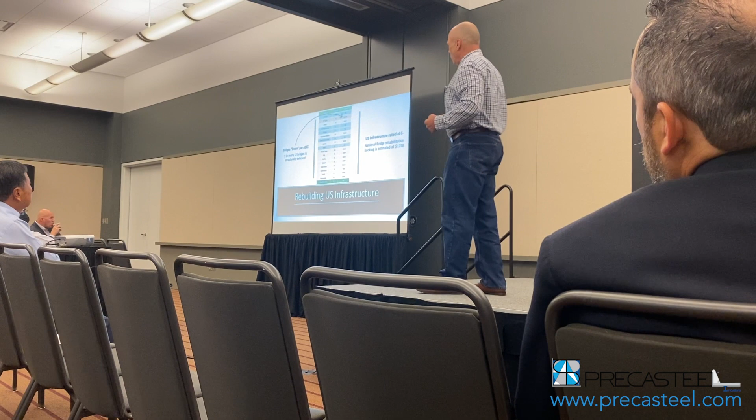But one of the areas that I found throughout 20 years in New York City, PMing jobs. I was with PB and I got pulled away by a headhunter for twice my salary to go to the construction side again. Started on the construction side, ended up back on the construction side. Money dictated, right? I had a couple kids, not your typical student or engineer, nothing in my life's typical. Anyway, these bridge brackets, every job I got on, I had issues with these bridge brackets.

Well, I had to commute 2 hours in, sometimes 3 hours home, a lot of time to brainstorm. And these are one area I started looking at as an area that could get improvement. During my military time, I was in Lebanon for 6 months. I saw these aqueducts built before Christ, and I saw the overhangs there, and I reflected back, I'm like, they're still building overhangs the same way they did before Christ. Come on, there's gotta be a better way.

They've improved the interior with the SIP forms and stuff, so why can't we do it out here? So that's where the juices started cranking, and I really started thinking about it. And everything's below, so it's really antiquated, and it's very time consuming, and it's very dangerous actually, because I don't know how many times I've come in and the winds have blown. It's basically a kite. Until you get any concrete on it, this thing's very prone to uplift.

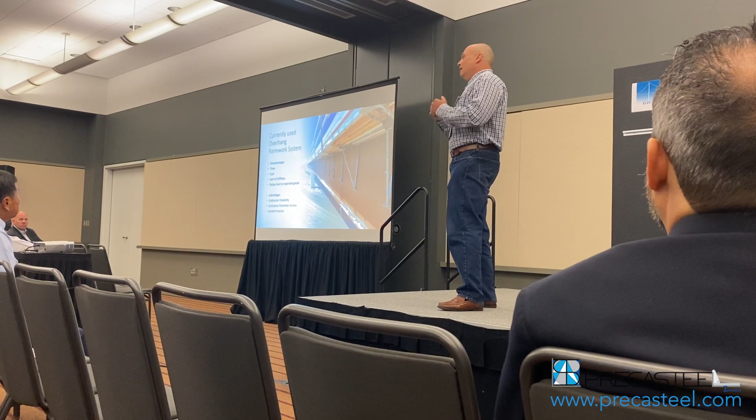And I've experienced, and most contractors have experienced, and I'm sure some engineers have heard about it, but it's really not a very safe or fast way of doing this type of construction.

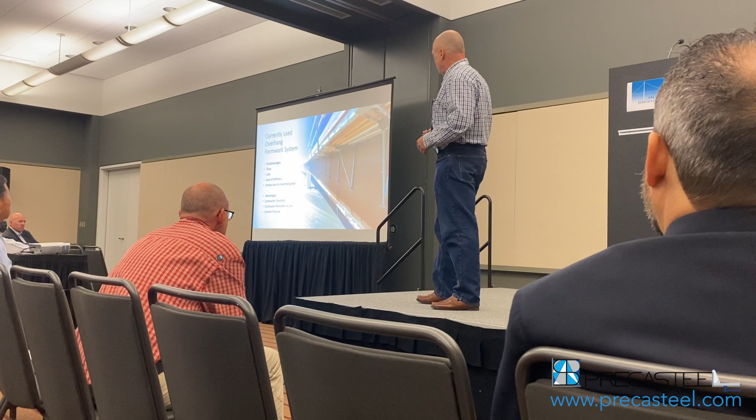Here's one of the pitfalls that Texas DOT found. Because of their bulb tees and their flanges, so on top of all the obvious stuff, there's stuff that's not really intuitive, but this shear failure here is basically just a point load on the edge of a thin flange, and it doesn't matter how far back they put it, that little rod's gonna bend, and you're still gonna get that force, and it's still gonna break.

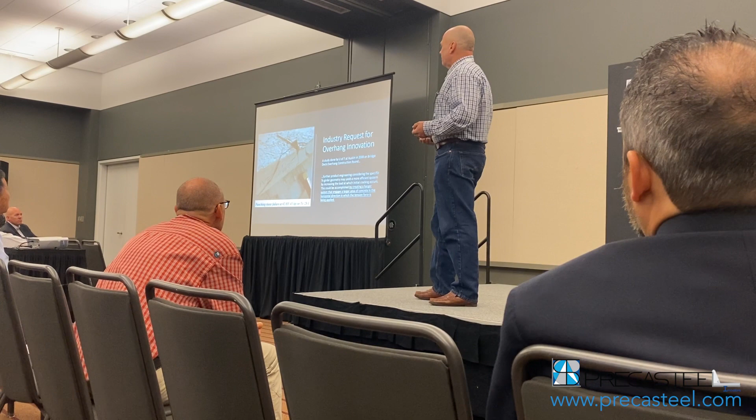So I think they've gone a couple of different routes to try to fix it. One way was to put a conduit and bring that through the flange, which precasters hate, because now they got to go inside the form. So, you know, it adds cost, time, it's not serendipitous by a long shot.

And the Texas University comes up with a study and they kind of talk about, oh, but they're thinking inside the box too much because they're talking about how they can create a better hanger system. Just throw the hangers away. Get outside of the box, start looking around, don't open it up just 180. Let's go 360 and really start looking at how can we solve these problems that we have out there and keep it simple.

And that's what I did with this panel. It's basically just an L-shaped panel. There's nothing to it, that's precast. Started out 2.5, we're now at 3 inches because when we did this project at LaGuardia, they wanted guidelines and specs to follow. And I'm like, nobody does this. I'm going to ACI, PCI. Nobody has anything on it.

I don't really have any foundation, but I found something with the Architectural Precast Institute. They have a bunch of good guidelines and they give you standards to follow, with certain ratios to keep. So we increased it to 3 inches just so that we could stay within their guidelines and be a little conservative considering the innovation, it's very new. So we want to make sure we're always erring on the side of caution. But I'm going to break this down in a couple pieces in the next couple slides.

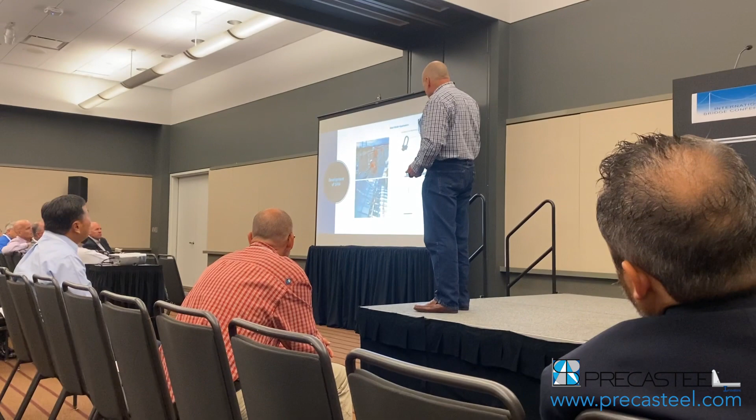So this secondary tie is just that, it's belts and suspenders. It's not really needed, what it's there for is we don't want this guy to bring in a piece of rebar and bump it and knock it off its shelf. So the key is that that's only there for redundant systems.

The other thing is, this has been vetted through New York State DOT. New York State DOT wanted redundancy in the system. And I said, there is redundancy. Yeah, but you only have 2 ties. What if we take 1 tie off? It doesn't go anywhere, it's redundant. It only needs 1 tie. Even eccentric, you can stay up with 1 tie.

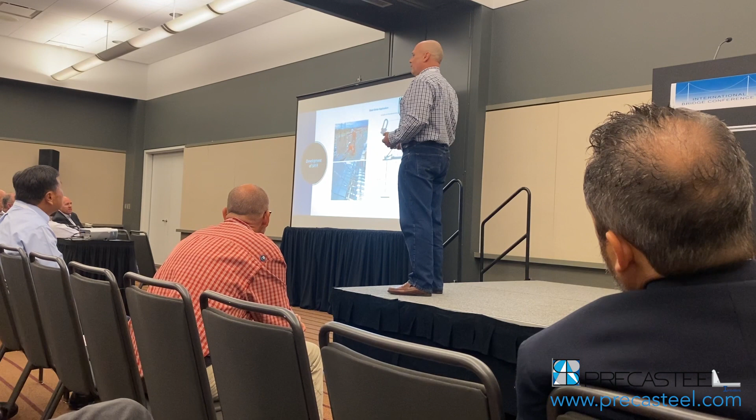We have a whole test series at Lehigh University, ATLSS Labs. So this has been in development for 10 years. The patent's 10 years old. We got 10 years to go. And this was the LaGuardia Airport. It was gonna go into the Delta Airport, but the doggone pandemic got in the way and it lost a lot of its momentum. So I'm here to kind of revitalize it because it's a keep it simple, stupid idea that we really need to get out there and get the contractors.

And with the design build environment, there's a lot more collaboration, and I'm hoping you engineers can bring it to the contractors because you'll be the shining star, like, wait a second, you're telling us a better way to build? That's what we do. You design. Share this with your contractors and all your design build contractors. I guarantee you, they'll like you for it. So one thing is we have a partner in ShoreBuilt.

They're out of Chicago, and they're helping us with all our development of the hardware. And this project really, you know, we had a ton of lessons learned from the beginning to end. But there was 1,800 linear feet. That's 9 spans of bulb tees, 9 spans of steel girders, and 2 of those spans had curvature to them. So we went through every possible aspect.

You know, I wanted to do a county bridge, but this is what Skanska Walsh gave me. So it was like, okay, here we go. We're going in the gauntlet, and we came out shining. It's just that the pandemic hit us on the backside.

So the swivel lift right here is very important because we don't want any prying action to be put on those inserts. So this is an absolute with handling the actual panels. Whether you're at the precaster or in the field, you always want to be using this swivel lift, which basically has a pin right here and takes that prying action away virtually.

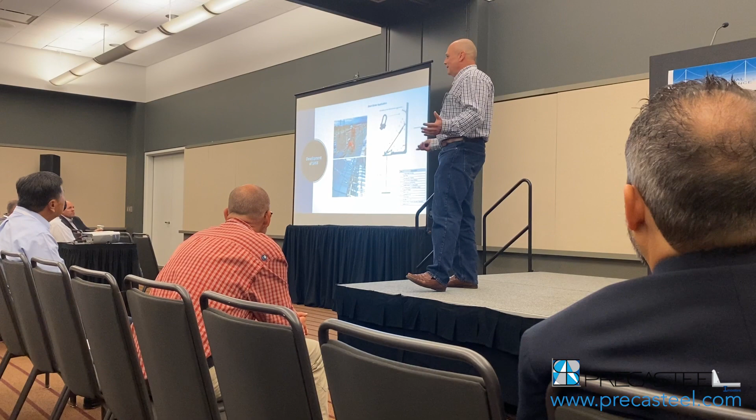It's just that I'm not a salesman, I'm an engineer, I'm not a politician, I'm a veteran. So I really need help to get this out to the masses, because it really is a great idea. Good job, Gary.

This is showing a shear stud just shot on the beams. So the same guys out there shooting your shear studs just throw in a different head and they're shooting these thread studs on. And out on LaGuardia, WSP was doing the review, they allowed them to count it in their stud count because they were 7/8 diameter, as long as they had a nut on the top and they extended them up 2 inches into the slab.

And I'm going to show you a couple lessons learned out there. Place the clicker here. I got it.

Okay. So in here, there's a splice plate that we have to negotiate over. In our early prototypes, we haunched this section, but the precasters didn't like it. They need a separate form. So what we ended up doing was just thickening the slab. You get a thickened panel there, and that notch becomes a little deeper to accept the additional depth of the splice plate. Problem solved, fast, easy.

Another area was where they have the straps for the SIPs. They like to hook it around the flange. We wouldn't let them do that. We told them, no, we've got to be bearing directly on that flange. And I dubbed this a line load, because I did testing. That was my biggest concern when I first came up with the idea. So I went to Home Depot, got a bag of 5,000 sack, 6-inch samples, and started putting my son's weight set on it and as much weight as I could. And I couldn't get the thing to break.

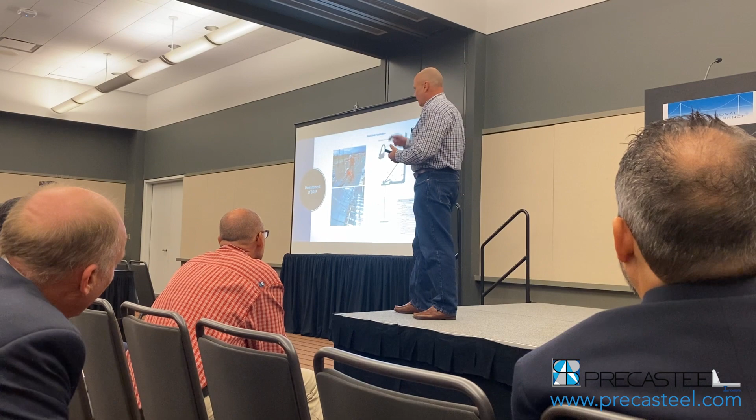It's almost like a splitting wedge, you would think, but it doesn't act that way. It finds itself very solidly, so you get full pure distribution along the entire length of the panel, which are now 5 feet standard because New York State DOT has control joints at 5 feet. We started out at 8, but we evolved into 5 feet, which is also very good for camber and also very good when you're negotiating, chording a curve. It looks like it's actually curved, but it's not. So you got a bunch of 5-foot vectors.

So this is our standard arrangement. Now, we did testing at Lehigh, and the testing was out to 39 inches soffit width. That soffit width, I'm not saying overhang, I'm not saying from the center of the girder to the outside, I'm saying from the very edge of the form to the outside of our panel. We tested up to 39 inches very successfully, and we couldn't get full failures. I think we had over 6 factors of safety, and it performed way better than we thought. Lehigh was there. We have reports that we could share with anybody that wants them, at their ATLSS lab.

There's a lot of notes up here that I'm not going to go over because I want to save a lot of time at the end for questions. This tends to be a very innovative new product, so I know I'm going to get a lot of questions at the end. I hope I get a lot of questions.

But I do want to go over some of the advantages or some of the uses of these inserts. We started out with plastic, we had zinc, and we ended up developing with our shore builder, our hardware partner, steel. And it didn't have anything to do with the strength or performance. It had to do with iron workers out in the field; you're gonna break it. They're gonna cross thread the plastic, they're gonna cross thread the zinc, and these steels are just bulletproof. And that's what these panels are now, they're bulletproof. So there's a lot of conservatism built into these panels for a number of reasons. One is the iron workers. The other thing is slip forming.

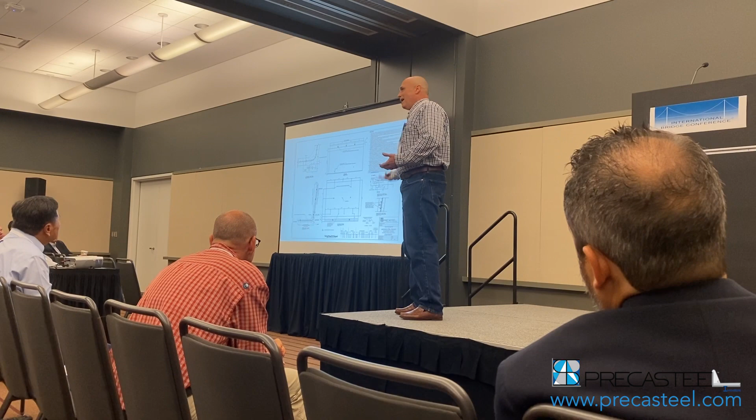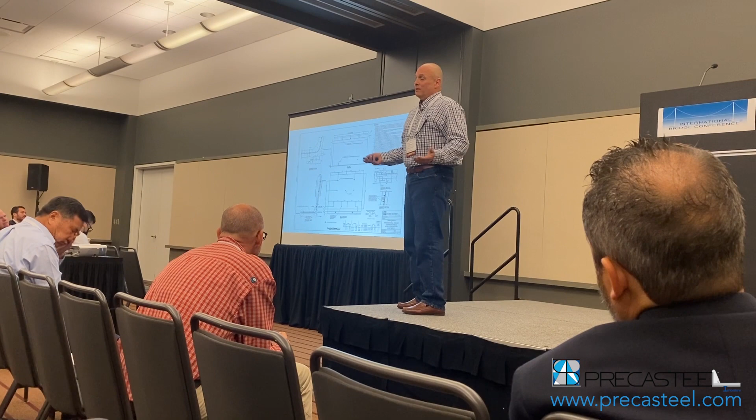So some bridges, they might need to transverse around the Bid-Well. A lot of staging now, you're doing everything in stages, right? So you really don't need that in most cases, but on smaller bridges, if they're doing the whole span, that middle one right there, we keep that there for a pick bracket, so that if the contractor needs a transverse, he can. But he doesn't have to go to the outside. We don't want him on the outside; that loads a little, you get a little bit more eccentricity. There's no bug holes, nothing to rub out, no work out there anymore. So, 10 years is a long time for lessons learned, and these are the kind of stuff that we've learned, and it's ready to go.

Oh yeah, so the other thing is, once you pour the deck down here and you lose your 8 inches, which this is, the height here is for an OSHA height, so once the panel goes in, you don't have to be using your yo-yos.

Out in LaGuardia, lathers were coming up to me like, oh man, this is great, we're not tripping over yo-yos, we get to take more breaks. I'm going, what do you mean you get to take more breaks? Oh, we're moving twice as fast as we usually do. I go, so why are you taking, well, we don't want them to know, the supervisors. So I'm like, oh.

Same thing happened with the guys setting the panels. I'm taking videos, I'm like, guys, speed it up. Why? I go, you can go faster, right? Yeah, but we're just doing a span a day. That's it. That's all they're expecting. I go, well, no, we could do 2, maybe 3. I'm like, guys, could you please go faster? No, they were just, who are you?

But unions are kind of tough when it comes to really getting the go. So it's new. It's going to take a little while before people really start getting up to the production rates where they should be.

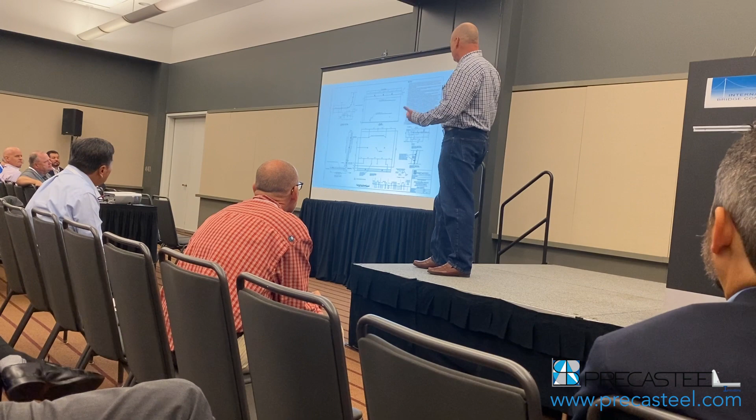These inserts are steel. They're also located behind the horizontal bar. So your inserts are never gonna be a problem. There's never any concern with any type of conical pullout, because you would have to literally rip the entire wire mesh reinforcement out to do so.

And these upper inserts, like I was gonna say before, you had the OSHA height before they pour the deck, but once they pour the deck, you'll lose your railings down to here. So our hardware shore built basically these rails, just a simple angle with a bar across the top, that gets you back to your OSHA height, that you can use until you get your barrier steel up, and then you can take everything out. So you do get faster production with your other trades, is what I'm trying to say.

This is the latest and greatest. Keep it simple, stupid. We had several different iterations of hardware design. This is basically a stud. The stud's just shot on the beam. It could be a rebar too. We have a rebar clamp that does basically the same thing, and your secondary and primary both come into the same location. So this does a bunch of stuff as far as construction tolerances also, because you have a lot of leeway of which way you can take those loops and turn them, and nothing has to be perfect. There's a lot of construction tolerances in this product.

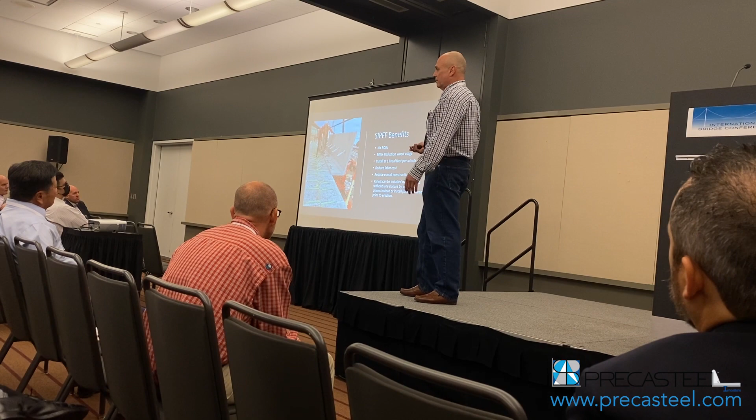Finishing, bunch of different ways to finish, but this guy right here basically taught us all the proper way to finish. We finish from the front side. As that auger rebounds off the rail, he basically reaches in there and he makes it look like glass. I showed up one day when they were doing some of the early pours, and I was standing in the back, and everything was finished between the rail and the barrier, and I'm like, how are they doing that?

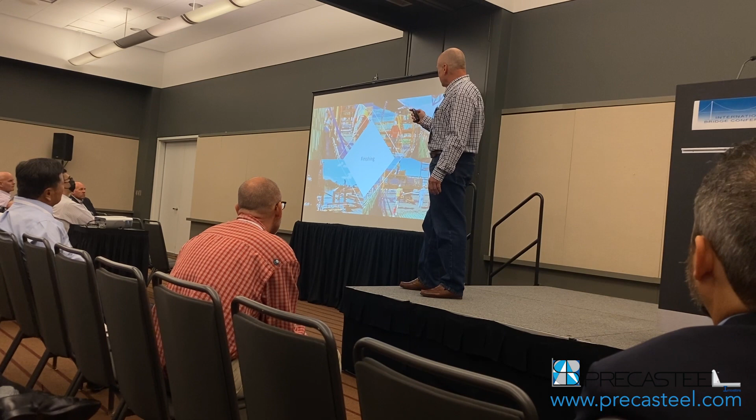I'm watching the guy on the work bridge. This guy here was just doing the spray, the curing compound. He wasn't reaching down. He doesn't have a trowel in his hand. This guy was the guy doing all the trowel work, and it was very serendipitous. No extra guy on the crew, and a lot of times the contractor would hit me with that question, like, well, how are we supposed to finish between here and there?

Because they like to put the rail out on the actual bridge brackets, which would put them out on our panels, and we don't want them on the panels because it will generate stress cracks with that kind of weight. It's too hard, and everything kind of grows, and it's no good also from rebound, because as that Bid-Well goes across, it deflects, and you get this washboard effect.

I was just talking to one of my fellow speakers, and they said, yeah, we had a diamond grind. I go, I've had a diamond grind a couple different times, and you start seeing bridge brackets like 1 foot apart, that's why, because they can't afford that deflection. Comparing it, I don't think there is any comparison. It really does become very aesthetic.

This is the frontage road, so this is the front of the terminal, the central terminal. This is where they want the pristine. This, however, they put water in the mix, they over rubbed it, scaled it. That's now falling apart and delaminating already, and this project's not even a year old. So from a service life, this makes a lot of sense for the owner, much less permeable, all the shop control, and it really does look beautiful at the end of the day.

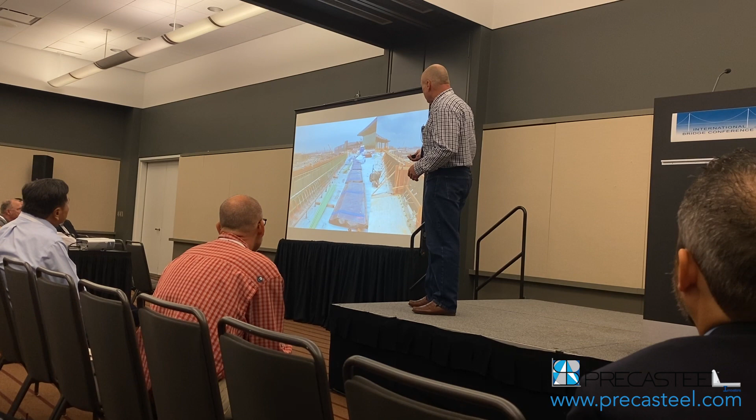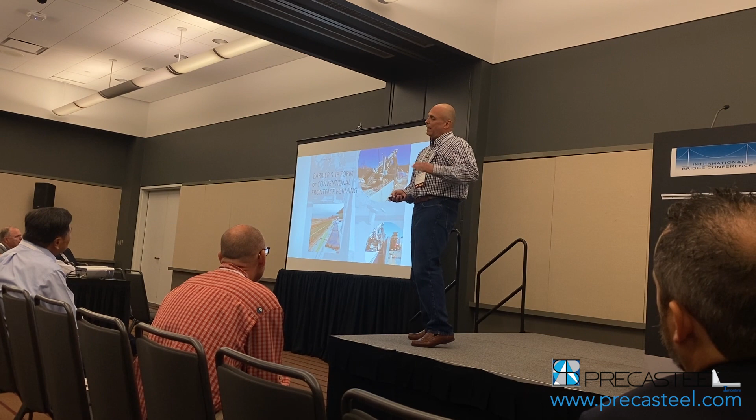A couple different shots, you can really see the studs that we're talking about, some of the stuff up close. I'm gonna run through because I'm not gonna have much time for questions, but there's the slip form. We had to do a full-scale slip form demo for Skanska Walsh, who was the contractor, because they intended to do slip form. That's where they had the huge savings. But they got landlocked out because they didn't have any bridges built on either side of this structure yet.

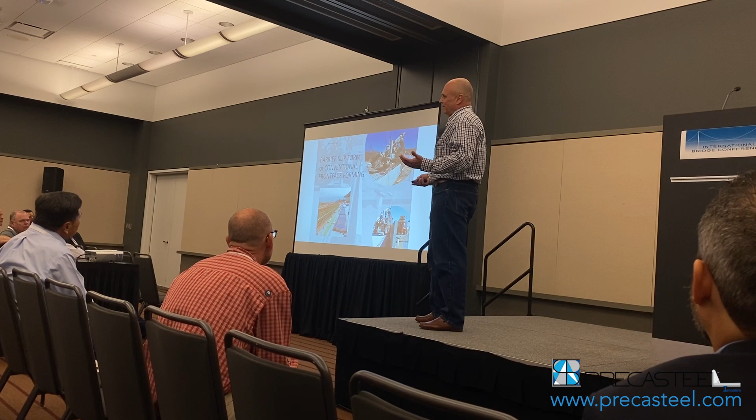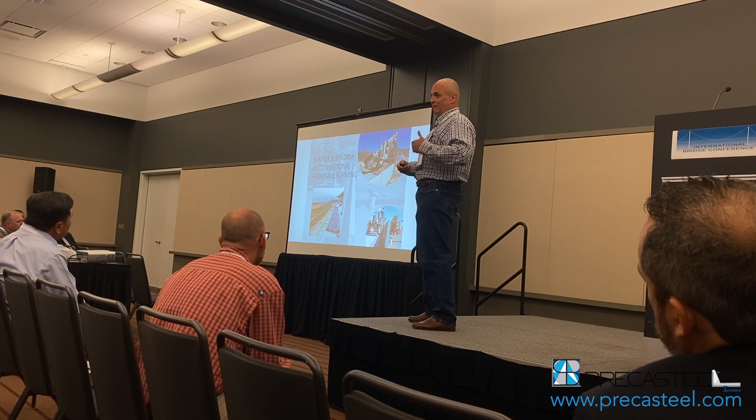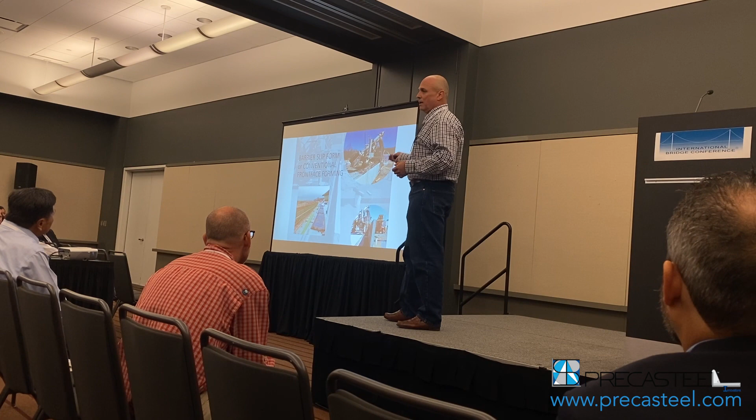So they looked at it and they said, you know what? This thing's so fast, we're gonna do it conventional anyway. They were thinking about lifting the slip form up, and they said, we can do it just as fast, conventional almost. There's really not a crazy savings difference than what they thought. They were comparing the slip form to the antiquated old way bridge brackets, huge savings, a huge difference. But not so much once they got into it and they realized, wow, this is faster than we thought.

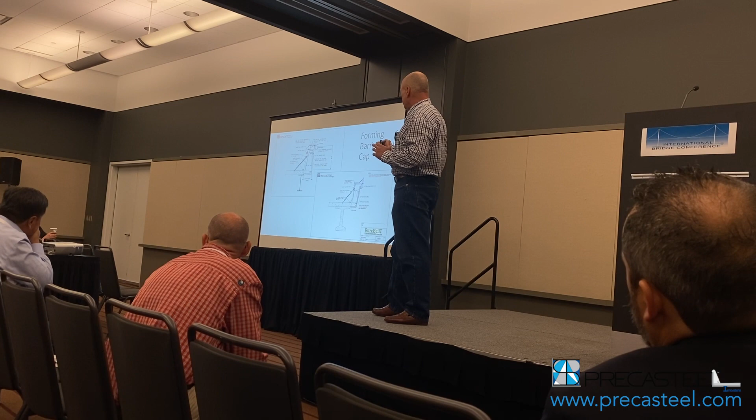Another thing, here's the Shore Build has designed some forming systems. This is if you're not doing slip form, standard conventional timber, or like a barrier that just kind of flips over. This one's very fast. This one really makes it fast. This one right here. There's the finished product, and I'd like to open it up to questions.

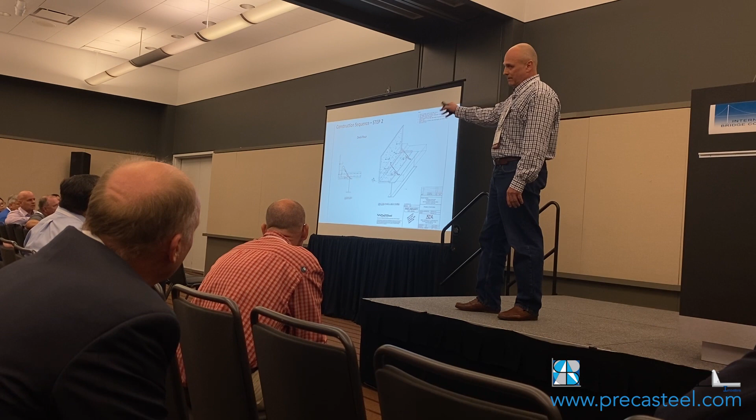I got a ton of questions, but I still don't get it. One thing is, you got all those little diagonal braces in there. Where do they go? They come out. Well, if they come out, how does the thing hold itself up? Well, here's the first stage, right? You're putting the panel in. Second stage, you pour the deck. Once you pour the deck and it cures, those lower inserts, it's secure. You can pour up against it. So those diagonals come out in that second stage as soon as the deck cures.

So the traditional brackets put torsion on the beam a little bit. Right? Yours puts it all right on the top flange. That's a whole different stress distribution. But it distributes it. So we've only had one job where we had an issue with the top flange. That was at the very tip of Long Island because of a flange tilt.

And that was a bridge that was designed with the fascia girders based on actual loading, and since they don't see all the live load, back in those days, they designed them differently. But you found out over the years that those are the girders that deteriorate the most, so let's just make them the same size as the governing girders. That's pretty much what we see everywhere, and we haven't had any issues with that other than that one instance. And that was the first time I saw one of those bridges and heard that story. So it was kind of enlightening.

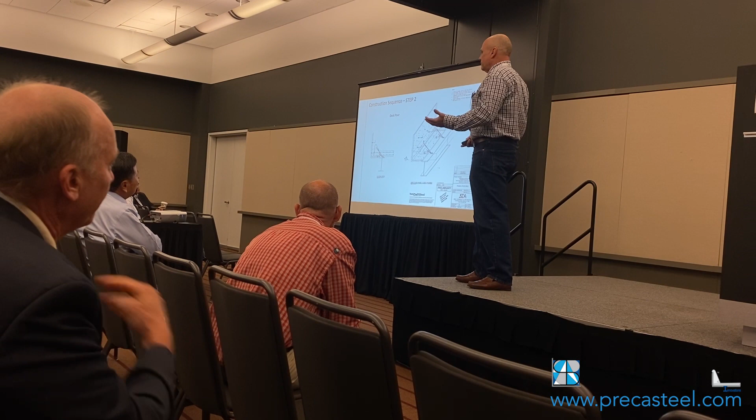Any crash testing has to be done in the system? Say again? Crash testing for that? Well, New York State DOT, they have one caveat. They treat it as means and methods. They want an engineered submittal just like you would for a bridge bracket submittal. And they want you to hold the inside of our panel to the outside of the proposed form line. So when you look at this barrier here, this is actually all design barrier. Everything inside our form is per the proposed drawings.

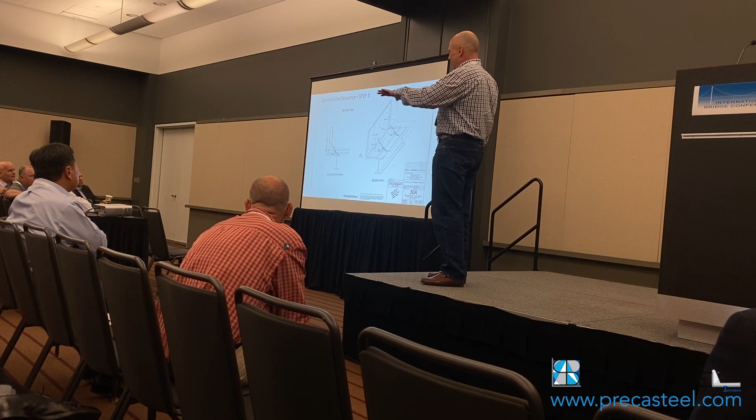How much is the load, per foot, extra load? Could this load become permanent load? What is the load? The panels range from about 1,000 to 1,500 pounds total, and they're 5 feet, so 200 to 250, something like that. So that is additional dead load in the design? Yeah, you do, but not necessarily, because when you start looking at the camber, it's incidental almost, but they did include it in their design on the LaGuardia.

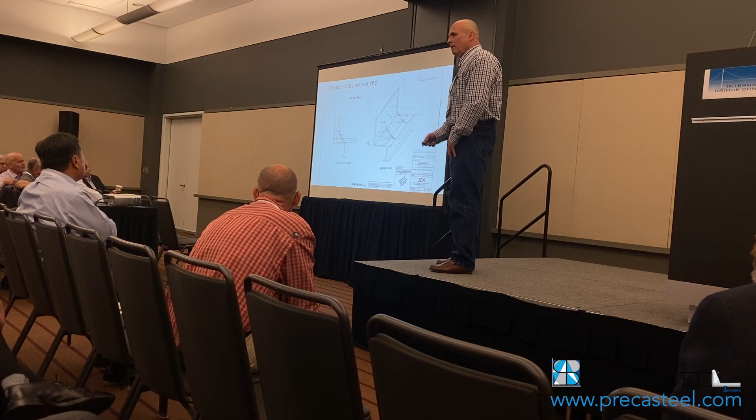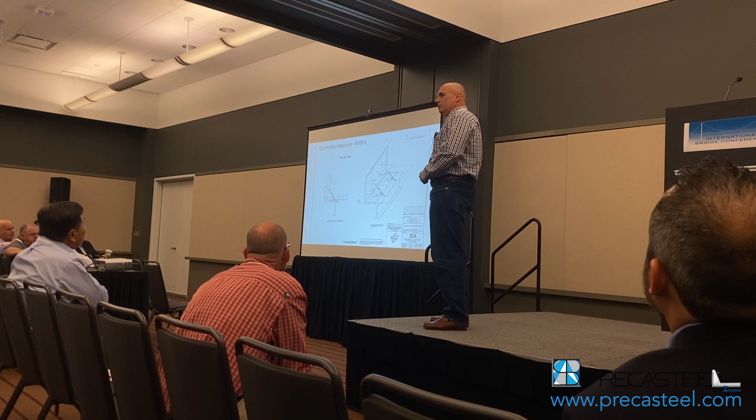You said 39 inches from the soffit. Is that like a maximum? That's what we're tested up to, and I wouldn't go beyond that, because then maybe you start getting into some flange tilt issues and also some stress cracking, and we just don't recommend it past the testing that we've done today. Even though I've doubled the reinforcement from the testing, and the reason we doubled the reinforcement is because of slip forming. Slip forming can create reverse stresses that we're not anticipating in all our engineering and design. So again, belts and suspenders, it's double the reinforcement.

A 4x4 wire mesh is what was tested and what was used out here. But working with the slip formers, and just erring on the side of caution and looking at cost, it doesn't really cost much more to add that little bit and increase concrete strength. The material technology is getting better and better. So we put twice. Now it's 2x4 wire mesh. But if you had a smaller overhang, you could reduce the...

We've actually had PennDOT. We designed 2 bridges for the rapid bridge replacement. One of them had 0 soffit. It was just straight up and down. With those, you don't use the hardware like this. You have an insert straight in here that you're using. So it's just a little bit different. Once you get over 6 inches, I think, or 12 inches. There are 3 types of panel, type 1, 2, and 3, and it's all based off soffit width. Any more?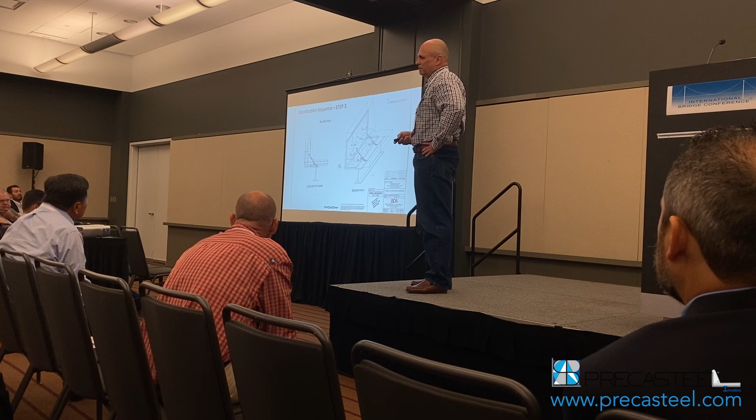Yeah, from a contractor's perspective, a couple of questions. I see that you're running the screed rail for the finishing machine on the girders, presumably on pipe sleeves for the yokes. It looks like from your pictures that you're just leaving those in. They did that. In our mock-ups we pulled them as we went with the work bridges. They left them in and just grouted them back on this job. How do you pull the rail because you have no walkway? They're just pulling everything but the rail. And then they pull that out later and grout it back.

Yeah, because with a conventional overhang, what you're losing with this system is a walkway. Well, no. What I didn't show you is the pick bracket. You have 20-foot picks, and you have 1 bracket in the center of each panel. So you do have a way of getting back to pull them out if you want. So you run aluminum scaffold picks on the inside? Yeah, just 1-footers. They fit right inside and run along the inside the whole length of the bridge, if you want to, yes.

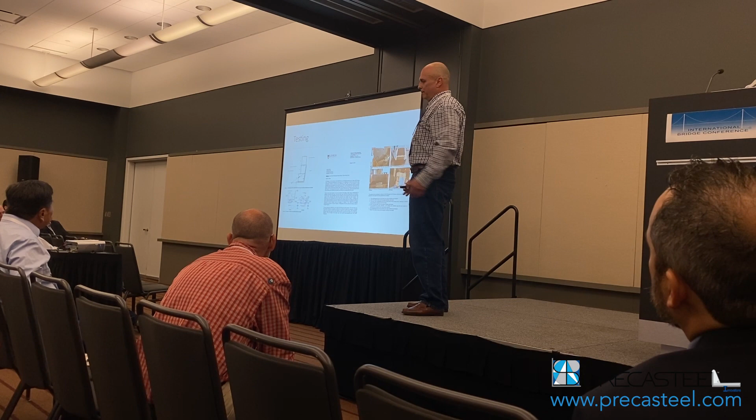Because I'm picturing that if you have a work bridge for the burlap crew, and you run out of burlap, how do you get the burlap out there? You don't have a walkway. Well, crane access everywhere. Like I said, when you have stage construction, you usually have that access on the other side. But if you don't, if you're doing a full width county bridge, let's say, then you need to put your picks, like you said, from beginning to end, so that you can traverse your bridge well.

That's the testing from Lehigh. We could not get it to fail. This is filled with Black Beauty entirely, and we could not get it to fail. Even though calcs and everything said it would, we couldn't get it to fail.